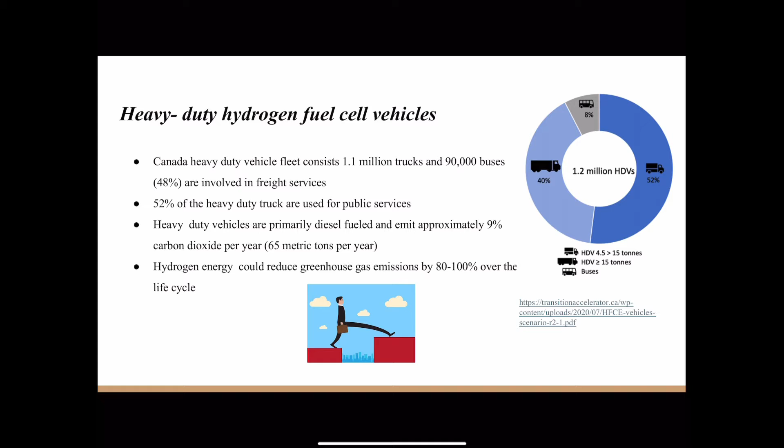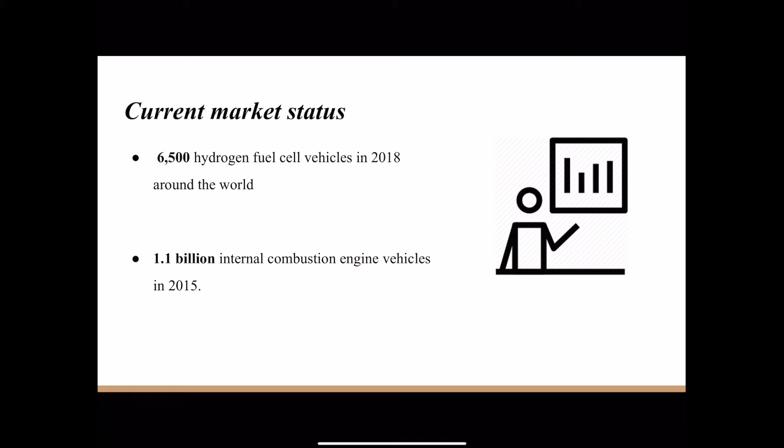Currently, many companies have been investigating and researching hydrogen fuel cell technology around the world. When it comes to the amount of hydrogen vehicles used, they only take up a small percentage of the vehicles around the world. Based on the research, there were 6,500 hydrogen fuel cell vehicles in 2018, which is much less than the 1.1 billion internal combustion engine vehicles in 2015.

Obviously, there are some advantages to hydrogen vehicles. First, it reduces greenhouse gases since the product of burning hydrogen is water only. Second, the hydrogen vehicle can be fast refueled. The hydrogen refueling will take up 3 to 5 minutes, which is different from the long-time charging for an electrical vehicle.

Additionally, the hydrogen vehicle has a long traveling range. A full tank of hydrogen can support the vehicle traveling around 500 km, which is close to the classic vehicle nowadays.

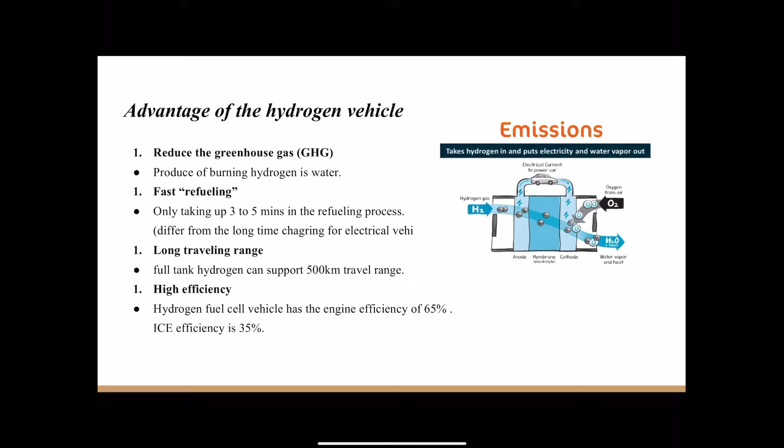Lastly, hydrogen has higher engine efficiency. The hydrogen fuel cell vehicle has an engine efficiency of 65% compared to the internal combustion engine's 35%.

However, there are some disadvantages that exist for the hydrogen vehicle. First, less infrastructure constrains its development. Based on the research, there are only 39 hydrogen charging stations in the United States, for example. Apart from that, the high cost of the vehicle itself also constrains development. Finally, from a safety perspective, people worry about the dangers of hydrogen technology.

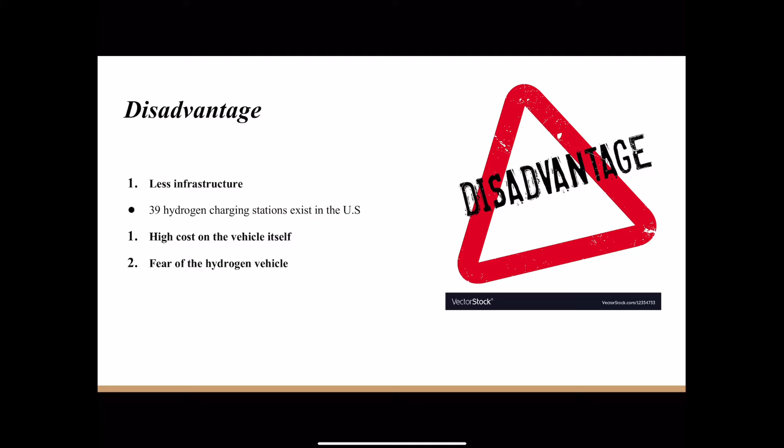Since the cost of a hydrogen vehicle is relatively higher for an individual, one implementable solution is encouraging public hydrogen vehicles like hydrogen buses and taxis, or a hydrogen sharing system. By doing this, more people can enjoy the convenience of a hydrogen transportation system and save costs on buying an individual hydrogen vehicle.

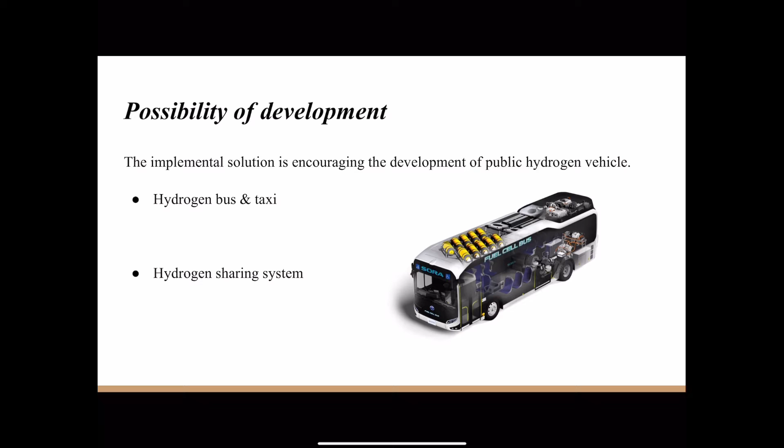So even though there are still many doubtful judgments about the hydrogen vehicle, the transition from fossil fuel energy to sustainable energy will never stop, because it will be the mainstream in the future.

Diesel heavy-duty trucks are a mature technology on the market today, and the capital cost of Class 8 freight tractors is about 165,000 Canadian dollars. Since fuel cell heavy-duty trucks have not reached commercial scale yet, the cost of access remains widely unknown.

According to the data, hydrogen fuel cell trucks are expected to cost 2 to 3 times as much as diesel trucks, which could range from 335,000 to 455,000 Canadian dollars. However, as the cost of components falls, the technology is developing rapidly, and these prices could be even lower in the future.

The fuel cell system is one of the most expensive components, about 73% of the cost of the energy module. Hydrogen tanks are about 15%. By 2030, the cost of fuel cells can be reduced by 70% to 80%, and the cost of hydrogen will reduce by 85%.

But this cost reduction is based on a fuel cell truck production capacity of around 150,000 units.

One potential huge maintenance cost factor is fuel cell and battery replacement. Life expectancy is 25,000 hours. A 308 kilowatt fuel cell costs 190 Canadian dollars per kilowatt to replace. But these numbers will fall as fuel cell technology develops.

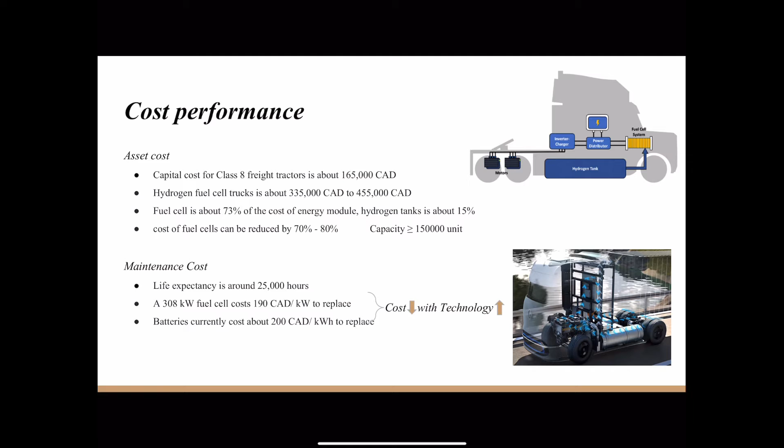Similarly, batteries currently cost about 200 Canadian dollars per kilowatt hour to replace. And another factor is energy cost.

The cost of hydrogen depends on how it is produced, distributed, and prepared for consumption through purification, storage, and compression. Moreover, the price of hydrogen will fluctuate with the price of raw material and the price of electricity for green hydrogen, or the price of natural gas for blue hydrogen.

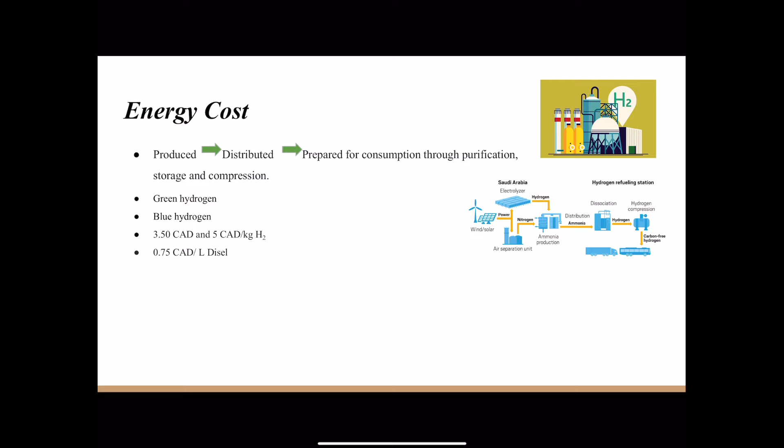In addition to the hydrogen production cost, a significant portion of hydrogen transportation cost is due to distribution. This includes transporting gas through pipelines or trucks.

CSIR estimates the price of hydrogen at between 3.5 to 5 Canadian dollars per kilogram, and the wholesale price of diesel is 0.75 Canadian dollars per liter. But since hydrogen is about 3 times the mass of diesel and gasoline and is far more efficient than them, it is more cost effective.

Due to the low price of natural gas in Canada, the wholesale price of hydrogen produced using SMR technology combined with CCS is expected to be less than 1.5 Canadian dollars per kilogram if produced on a large scale. However, without a large-scale hydrogen distribution system, the retail price of blue hydrogen could increase by 4 Canadian dollars.

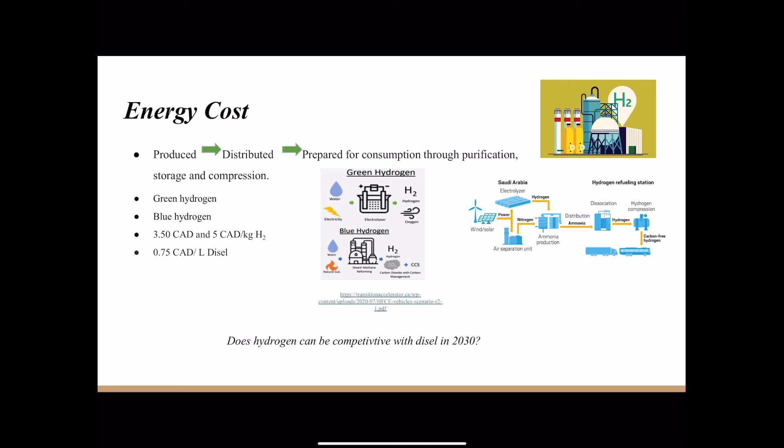However, with future electrolytic cell technology decreasing in cost, combined with cheaper renewable energy sources, some researchers believe that green hydrogen could compete with diesel as early as 2030.

Nowadays, long-distance haul tractors and trailers entirely depend on the diesel engine. To determine whether the hydrogen fuel cell truck could replace the diesel truck in the future, a comparison must be made between those two kinds of tractors.

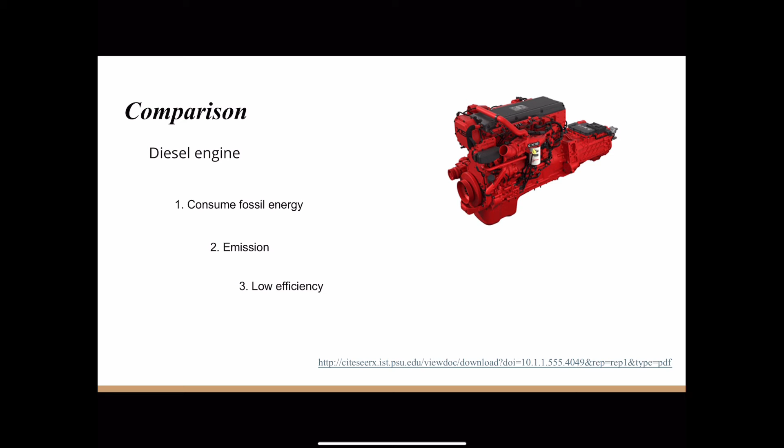The diesel engine is the most mature and common power resource now. However, it consumes a large amount of fossil energy and highly emits polluting gas including carbon dioxide, carbon monoxide, and NOx. On top of this, the diesel engine's efficiency is also very low, about 35%. Combined with transmission and drive shaft, the total efficiency is even lower.

Considering those disadvantages of the diesel engine, the hydrogen fuel cell stack and electric motor seem to be the best solution. First, efficiency: the efficiency of a hydrogen fuel cell is about 80%, and the electric motor efficiency is 90%. So the total efficiency is 72%, which is significantly higher than a diesel engine.

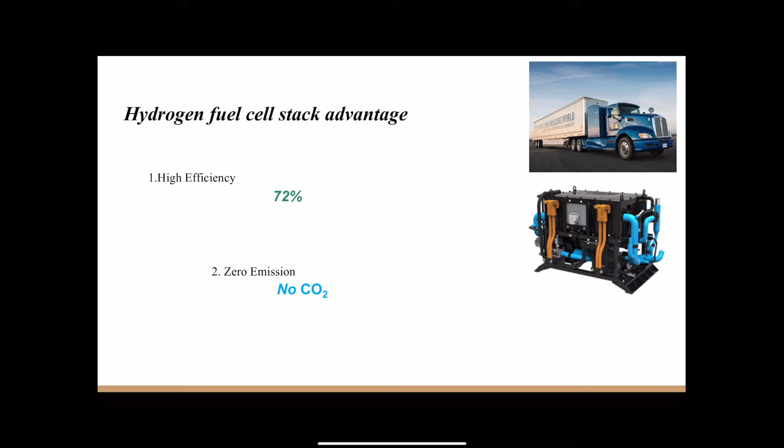Second, the emission of hydrogen fuel cell is only water, so it is much more eco-friendly than diesel and emits no greenhouse gas. However, there are also some problems to solve in order to take the place of the diesel engine.

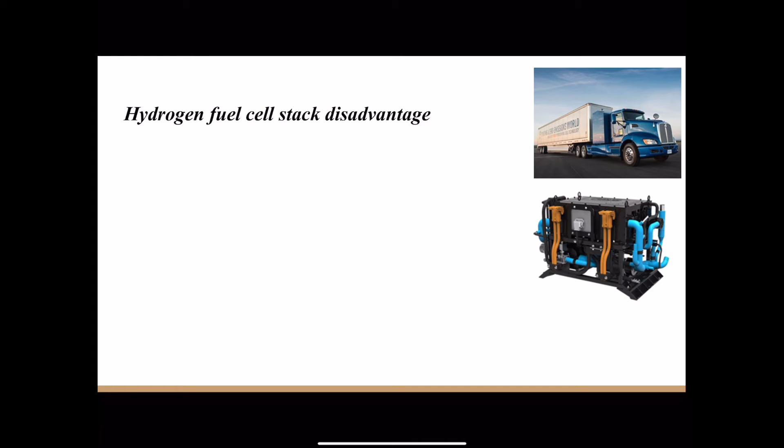First, the hydrogen fuel cell tractor is heavier than the diesel tractor. The diesel tractor's powertrain structure consists of a large diesel engine, transmission, and fuel tank, which are 2,876 pounds, 800 pounds, and 560 pounds respectively. The total weight added to the cabin and chassis is...

4,236 pounds. However, the hydrogen fuel cell tractor's powertrain system comprises an electric motor, fuel cell stacks, and fuel tanks, which are 4,500 pounds, 4,400 pounds, and 100 pounds respectively. The total weight is 9,000 pounds on top of the cabin and chassis.

Considering the total tractor weight, the hydrogen fuel cell tractor is 40% heavier than the diesel tractor. As a result, the hydrogen fuel cell tractor needs 28% more engine power and carries 4,764 pounds less load in the trailer.

Second, the fuel cell tractor carries less weight of fuel, which is less energy. Due to the limitations of hydrogen tank technology, the hydrogen tank can carry only 187.39 pounds of hydrogen, which stores 9.66 million BTU. However, the diesel truck can carry 730 pounds of diesel, which is 11.5 million BTU.

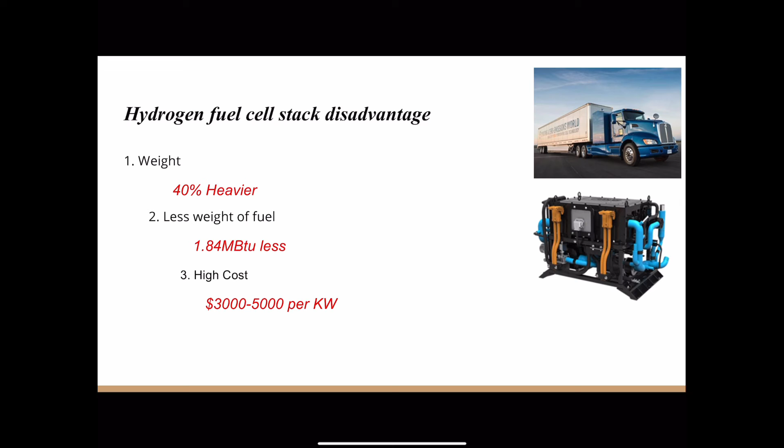Third, the cost of the hydrogen fuel cell stack is much more than a diesel engine and transmission. Hydrogen is approximately 3 times higher than gasoline in energy density by mass. However, hydrogen is almost 4 times lower than gasoline in energy density by volume, from passenger vehicles to heavy-duty trucks. Hydrogen is not volumetrically efficient.

There are two current physical-based solutions: compressed hydrogen gas and liquid hydrogen. Both methods require a high-pressure vessel, 350 or 700 bars. There is one more future material-based solution: by using metal hydride, it might potentially overcome the limitations of physical-based storage.

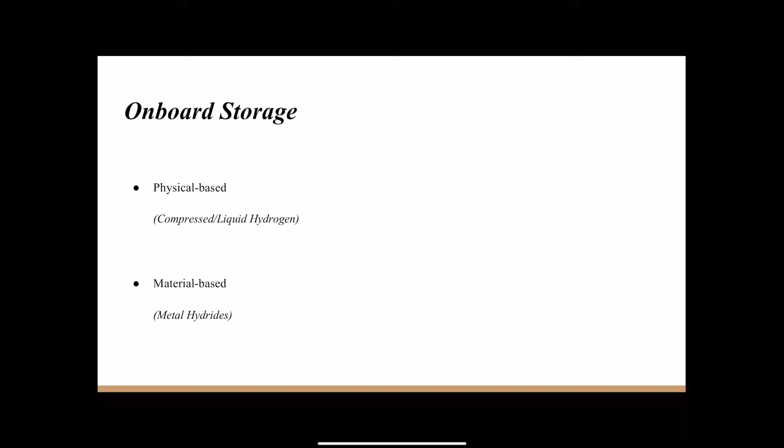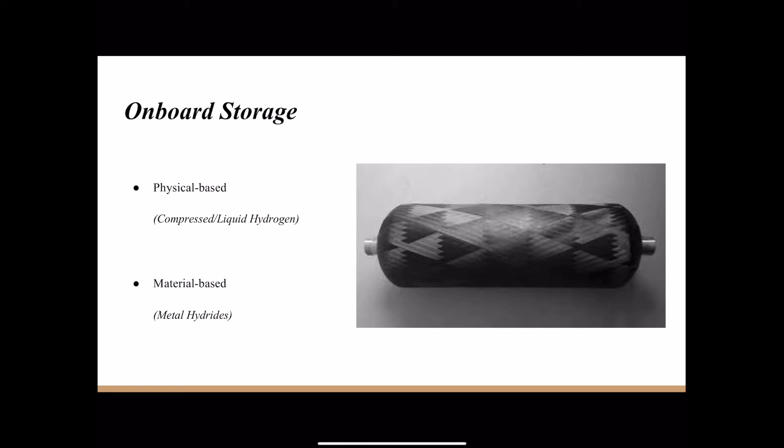There are three main vessel materials. Carbon fiber has the best performance but also costs the most. Glass and aramid fiber are way cheaper. However, they cannot perform as well as carbon fiber.

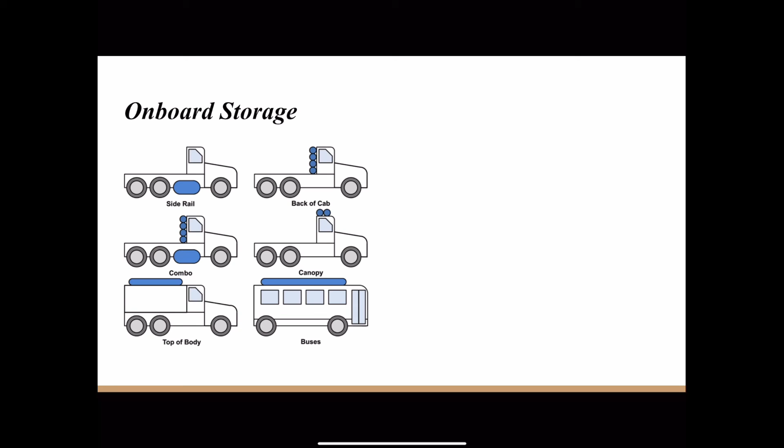Throughout the assumptions, analysis, and calculations, the approximate solution in storage tank size for medium and heavy-duty trucks is 50 and 85 kg of hydrogen at 350 and 700 bars. Moreover, in order to estimate the hydrogen storage sizing more accurately, having approximate values of the amount of stored hydrogen, mass of storage tank, gravimetric capacity, volumetric capacity, L/D ratio, and the effect of storage pressure all provide a useful starting point when considering how to design a particular fuel cell electric truck.

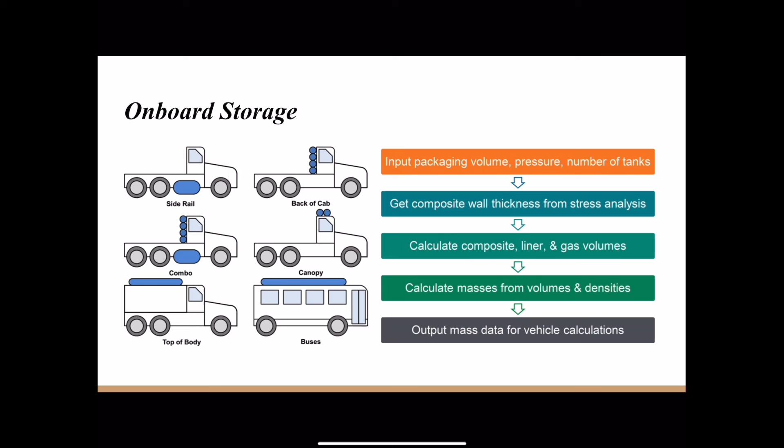To sum up everything studied so far, hydrogen, as the largest storage of green renewable energy on Earth, can improve the quality of human life and effectively protect the environment. But even though hydrogen fuel cell technology is more efficient than diesel or gasoline, both the technology and manufacturing of hydrogen fuel cells and the storage of hydrogen energy are extremely expensive. As a result, hydrogen fuel cell technology is not yet fully competitive with diesel and gasoline.

But as technology continues to develop, hydrogen fuel cell technology could become part of Canada's zero-emission approach, which is also in line with emerging innovations reshaping the industry, such as autonomous driving and physical internet logistics, as well as being a good fit for applications not suited to battery-powered electric drivetrain systems, such as long-distance trucking.

In addition, hydrogen fuel cell technology could be the starting point for a transition to a hydrogen economy with huge economic, environmental, and energy benefits. Therefore, it will take some time for the popularization of hydrogen fuel cell technology to fully enter our vision. Countries around the world should also make good preparations for the development of hydrogen energy technology and provide them with the systems they need.